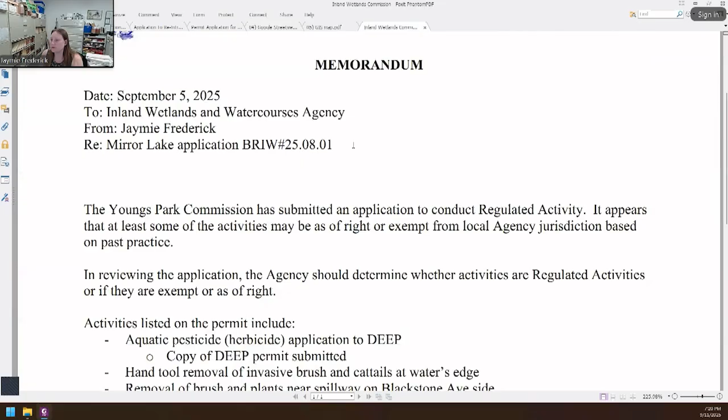This is Commissioner Bassermann. Jaymie, you mentioned that there was some uniqueness to this particular permit. Where does that raise your eyebrows in terms of its uniqueness? Yeah, so just for everyone's knowledge, this is a Google Street View image. It's kind of odd because it's not really from the street, but it's from June of this year. So I'm going to flip over to my memo where I kind of outlined the various activities. I think the aquatic pesticide application would be something omitted from the regulated activity the commission's reviewing based on past practice. I think the removal of invasive brush would be as of right based on past practice.

The management of cattails and removal of brush and plants near the spillway, I think, are activities the commission would probably want to keep within the purview of this permit, and perhaps move forward with reviewing those and issuing a permit for those activities if you felt it was appropriate to do so, and or requesting additional information to process that request. Because as we've established, the cattails are not invasive. I do know they can be considered aggressive, much like poison ivy, which is also native, and some other plants.

And then the removal of the brush and plants near the spillway, I think, is good from a maintenance standpoint. But given the fact that at this point it's kind of deferred maintenance, it would be consistent with the commission's past practice to take a permit and essentially have a final inspection to make sure that the work was within the scope of what was reviewed. This is Commissioner Bassermann, and as noted, if it was for the same reason that was mentioned, the spillway, the trimming of the trees would fall under that permit as well? I would agree.

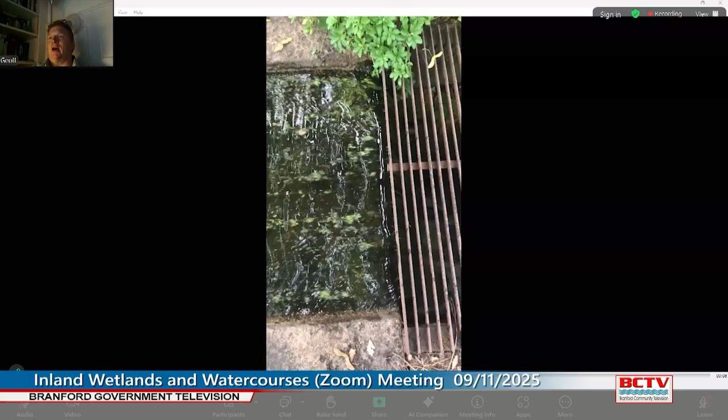I just emailed Jaymie a copy of a picture of the grating that currently exists over our spillway, which meets the DEP regulations. They have a whole set of regulations which makes all kinds of recommendations. The only thing that we might consider would be taking the grate and having it galvanized for longevity. But right now it's been there for 20 years, and I walk on it every once in a while, and it seems to be more than sufficient. Downstream, there is another pond, and he also has a grate over his culvert to keep snapping turtles from coming in and getting his ducks. And then downstream from there is a very shallow stream that goes directly to Long Island Sound, and these fish cannot live in salt water.

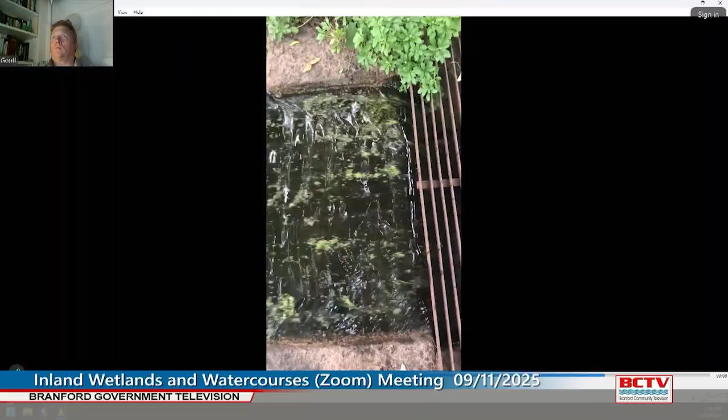This is Commissioner Bassermann. Do the carp have to be a certain size? They're triploid carp, and they come 8 to 12 inches, and they can grow to be up to 24 inches. And they're sterile, so they can't reproduce. Right. And the DEP recommendation was up to 36 based on the size of the pond. We were looking to do 15 to 20 as an introduction. Is the distance between the grate rails sufficient to keep the carp in the pond? Has that been determined? According to the DEP, it is. I did measure it at one time.

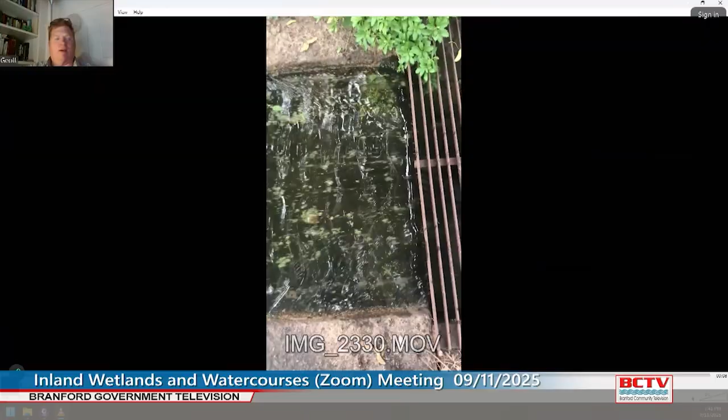This is Commissioner Bursky. Just a follow-up question. When you looked at the grates and measured them, there's no indication that the grates are loose in any way or would move? They're stable. It can be lifted up by 2 people. You can't see it all in the picture, but it's about 6 or 7 feet wide by 24 inches deep or more, maybe 36. That's a video. I have a photograph of it also. I understand that. That does technically answer my question. I'm trying to ensure that the grates are not so wobbly that if a fish grew to a size it could try to get under it or move the grate, but it doesn't sound like that's relevant. You're saying you need 2 people.

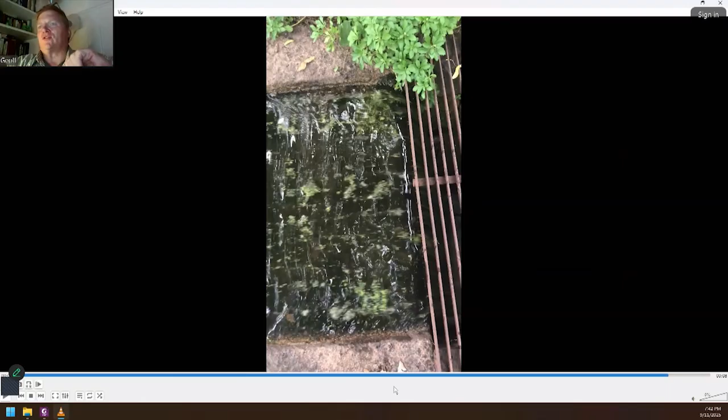Yeah. The grate is recessed. If you see it, it's actually at the bottom. You can see the spillway blocks are 24 inches wide or so, and that's shallow. That might get to 2 or 3 inches. And then at the bottom right, you'll see it's actually set into the stonework. So the stonework is set down 1.5 or 2 inches so that the grate rests on the stone, and then that continues to the back of the spillway. Okay. I appreciate that explanation. That helps. Thank you.

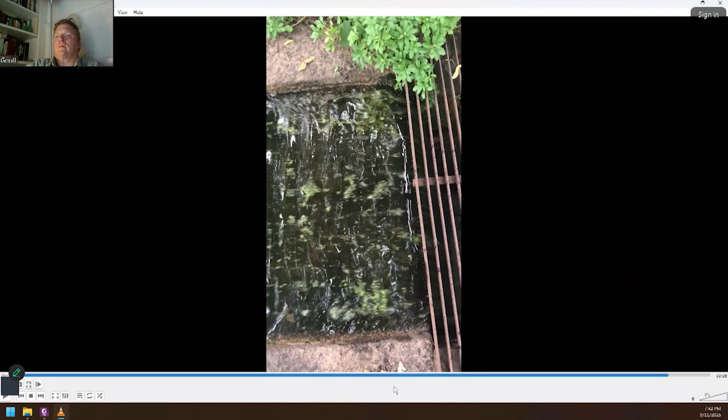Jaymie Frederick, the wetland agent. So this is also a pending application before the commission. If the commission determines that there's no jurisdiction, again, you'd make that determination. And then I would just suggest that since all the activities are outside of the commission's jurisdiction, I'd request the applicant withdraw the application since there's nothing to act on. And of course, if there needs to be a modification to that structure at any point, it might be a conversation at that time, beyond replacing the material of the grate, which I don't see having any significant impact.

This is Commissioner Bassermann. You indicated our jurisdiction essentially was associated with the grate. The grate looks like it's in decent shape, especially for how many years it's been in there. If it's not looking to be replaced, then we don't have to worry about the manner of installation and all that other kind of stuff. I think I'm okay with having the application withdrawn. Anybody feel differently?

No, this is Commissioner Bursky. I agree with you, Commissioner Bassermann. Do we have to take a vote on a withdrawal or no? No, I think there could be a general consensus here, and then I'll follow up with the applicant. Any commissioner feel differently? Sounds like we have general consensus, Jaymie.

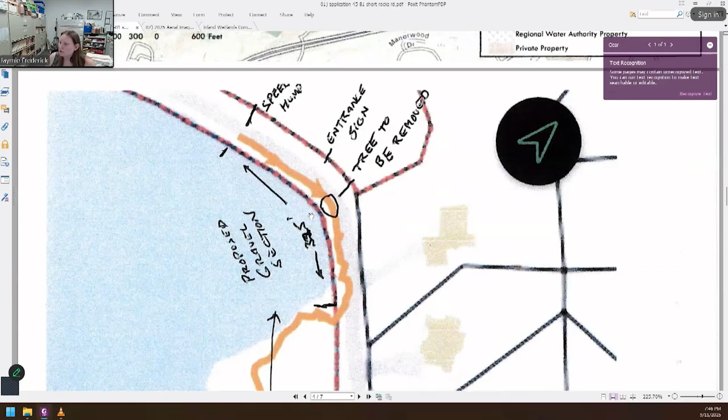Jaymie Frederick, the wetland agent. So this application is very similar to an application the commission had within the past year regarding a trail that kind of follows the roadway but provides an alternative pedestrian option, but on the other side of the pond. We do have the chairman from Parks and Open Space here to overview the application. And I'll just share an aerial image real quick to put it in perspective. Now I'm drawing a blank on the road. Short Rocks Road, coming in from the east side to Supply Ponds. The fish ladder access up to where the sign entering into the main portion of the park, I believe, is where they're looking to put the trail. So I will hand it over to Richard Shanahan to provide additional information.

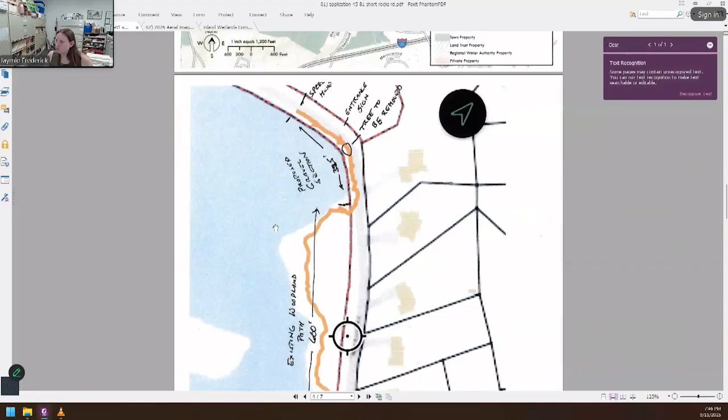Okay, if you could scroll up a little bit to get to that map. No, the other way. Sorry. Yeah, this is probably the most detailed I could provide. But as Jamie said, let me back up a little bit. There used to be a trail along this route years ago. I have no idea how long ago it was established. But over the years, with various storms and lack of use, it became pretty much all overgrown. We're trying to reclaim it. Parts are away from the road. From the parking area, it's like 65 feet. It's in the woods. There's a definite trail there. Then there's the other section about 600 feet long, and again, that's well away from the road.

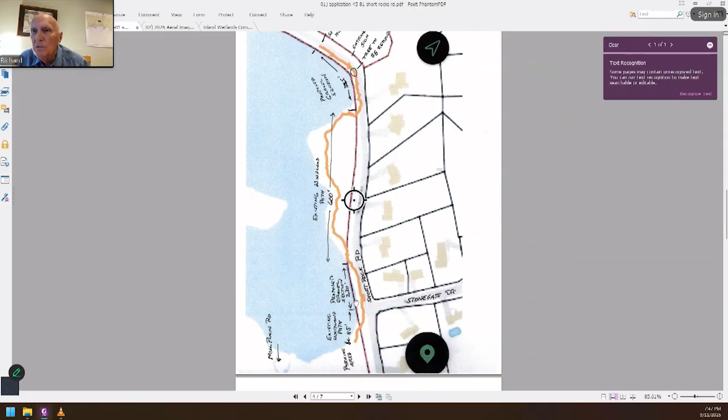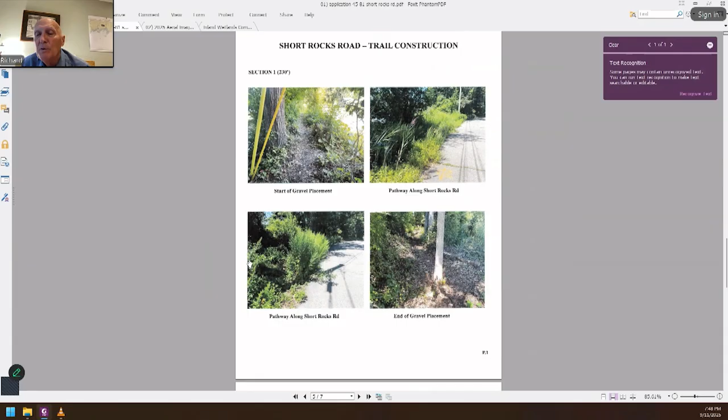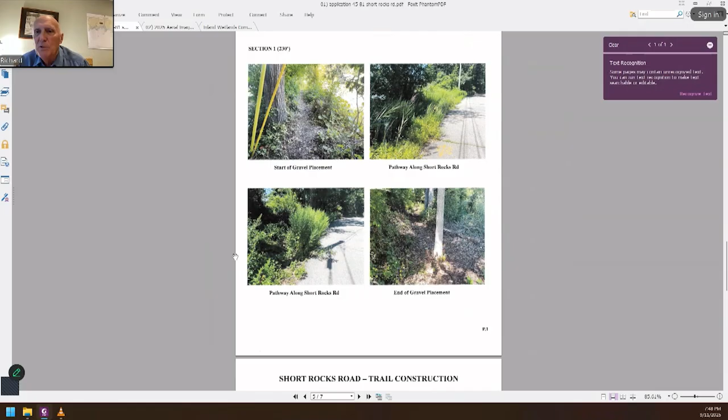The two sections that we're looking at: the first one is 230 feet. It's right along the road. Did the photographs come along with this, Jamie? Yeah. Okay, so in the first section here, the second and the third photographs just show you what it's like now. People are obviously forced to walk along the roadway. This section isn't too bad because it's fairly straight. But as people leave the supply ponds, they tend to pick up speed along here, and if you're walking with a dog, you truly are in the roadway. We're just trying to establish a trail basically adjacent to the road, and get rid of all those plants, most of which are invasives: mugwort, autumn olive, the usual culprits. We do want to put some gravel down to make it a definite trail, and just to get people off the road.

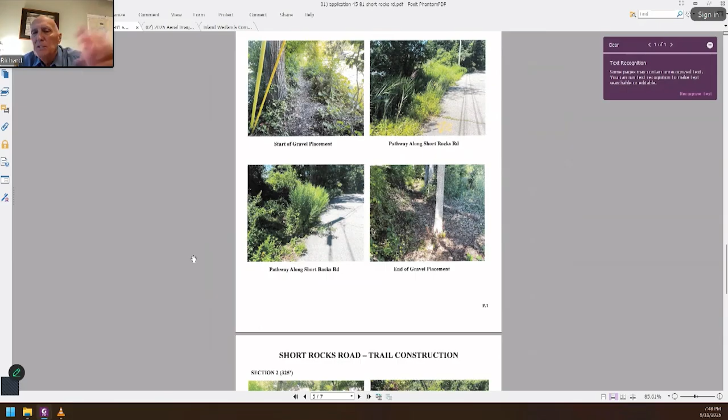So after this, it goes back into the woods. And then if you scroll down again, this is the second section. Where I said start of the gravel path, that's where it's going into the supply ponds. And again, the next three photos just show where it really is just trying to get people off the roadway.

The bottom two, you can really see where, because of the curve, it's a major sightline problem. And as people leave the supply ponds, the last speed hump, if you will, is just on the other side of that tree. So this is where people start to pick up speed.

Now, Jamie, where you had that hand, that is the tree that right now, out of this entire project, may be the more, I'm going to say difficult, but problematic. This is a half-dead tree. It's mostly covered with vines. At some point, it's going to die anyway and come down. But part of the project is to remove that tree.

This is Commissioner Bassermann, is that on the left or the right, Mr. Shanahan? I can't tell with the picture. That's on the pond side. On the far side? Okay. On the pond side, right. Oh, okay, pond side. Yeah, and it's fairly narrow there. So definitely the tree would have to come down if this goes through, because right now people are walking on the road and it is a blind spot.

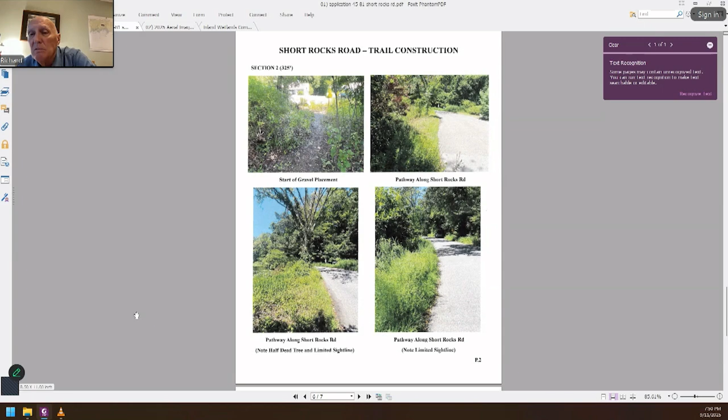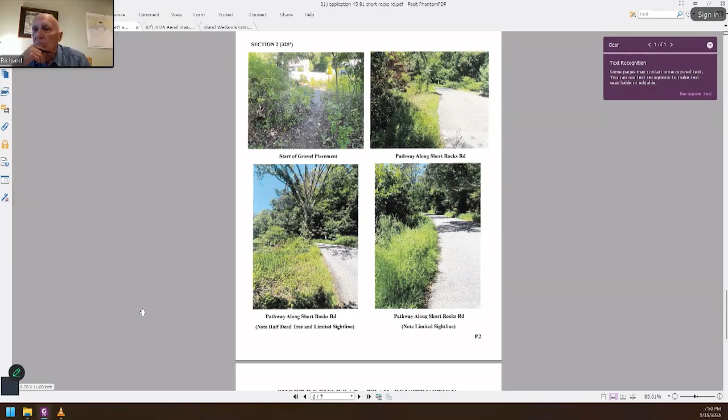And then the picture just to the right of that, where it's going into the supply ponds proper. Again, it's mostly weeds, just trying to get people off the roadway. And you can barely see, it's in the shadows, but that's the last speed hump. So the gravel path would go up to that speed hump. And then after that, people would be walking either on the side of the road or on the road.

Traffic, there's 3 speed humps fairly close together. So people really are slowing down here. Plus, it's more of a straightaway, and the sight line is really not an issue.

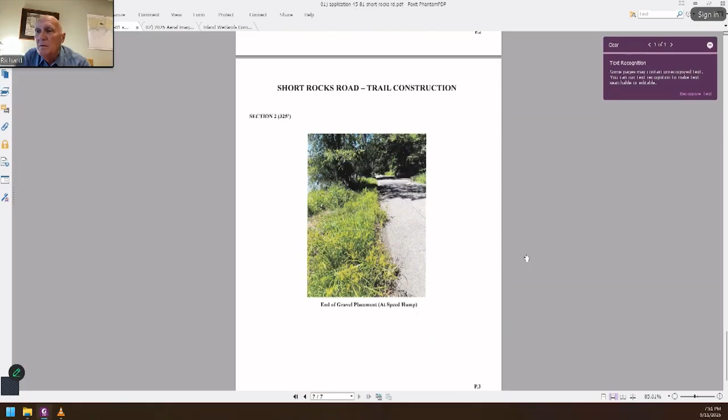This is Commissioner Bassermann, is the manner of removal anticipated? I'm sorry, the manner of removal of the plant material along the road? Well, basically, we're going to be putting down a gravel path, so Jim Boyd will be the contractor, and he'll be removing that and placing the gravel. Same type of gravel we have down by the Fishway, as well as on the trail along North Chestnut Street. The tree itself will be done by Wachowski and Son.

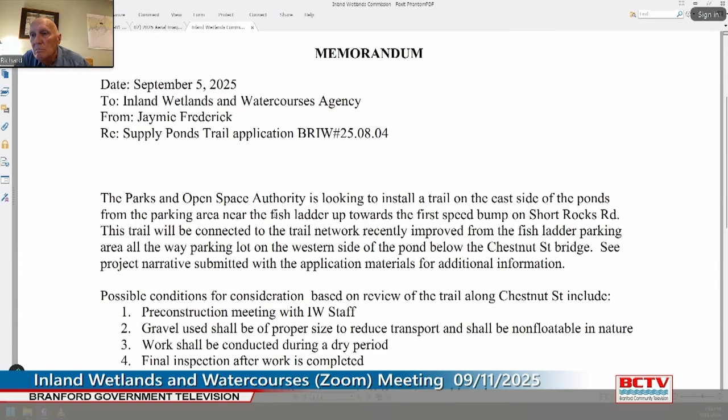This is Jamie. Commissioner Bursky. I'm sorry, Jamie. Go for it, Mursky. Thanks. I apologize if this is a silly question. Is this an extension of a previous application? Am I correct in thinking we approved an application of the same area or nearby? My memory might be off. I just wanted to make sure I have the facts correct, if you don't mind. No, that's a good question.

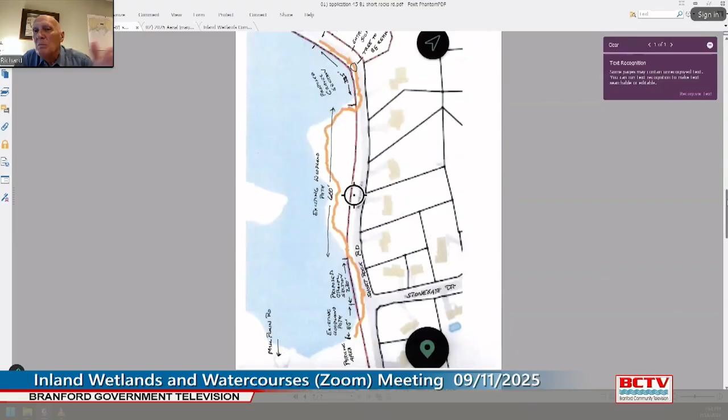Earlier this year we applied and were approved for a trail along North Chestnut Street on the opposite side of the pond. And that has been completed and is actually being fairly well utilized. But it's from where the hand is right now, from that parking area up to the next 2 parking areas up. It's to that point. So again, it just gets people off the road. There are no speed humps there, but this has actually worked out quite well.

Okay, this is Commissioner Bursky. I'm glad to hear that. So it's a different section, which is what I thought it was. I just wanted to clarify that I wasn't losing my mind. Same trail, same pond, just opposite side. Thank you.

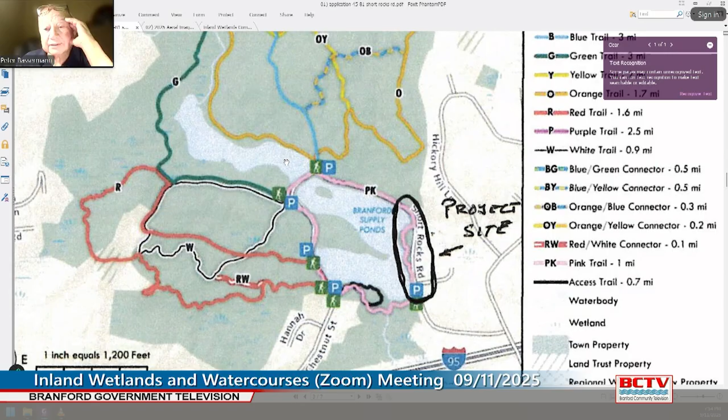Jaymie Frederick, the Wetland Agent. So I did prepare a memo for this application as well. And I essentially copied the conditions of approval from that last application, given that they are very similar in nature and just on opposite sides of the pond, if you will, for the commission's review and consideration. You want to post that, Jamie? Sure.

This is Commissioner Mirsky. Before you go over this, can I ask one question of you, Jamie? When you did a review of this application compared to the last one, recognizing there are two different sections and there seem to be some similarities, do you have any unusual concerns that would not be the standard similar issues we addressed with the previous application? Or is that not a fair question? That's a fair question. I don't have any unique concerns.

I did walk the proposed trail location with Richard Shanahan. So I'm familiar with where they're looking to put the trail, and I did review the tree they're looking to remove. We discussed whether it would make sense to try and plant another tree in the area. Looking around the area, though, the canopy is pretty well established, and there's not really another spot to put a tree that wouldn't become problematic. So I did not make that recommendation.

Essentially the possible conditions for consideration include a pre-construction meeting with IW staff that would extend to the contractor doing the site work, since I've already met with Richard Shanahan. Gravel used shall be of proper size to reduce transport and shall be non-floatable in nature. Work shall be conducted during a dry period, and a final inspection shall be completed after work is completed. And then, as is the case with all permits, the standard conditions and general provisions of all permits would apply.

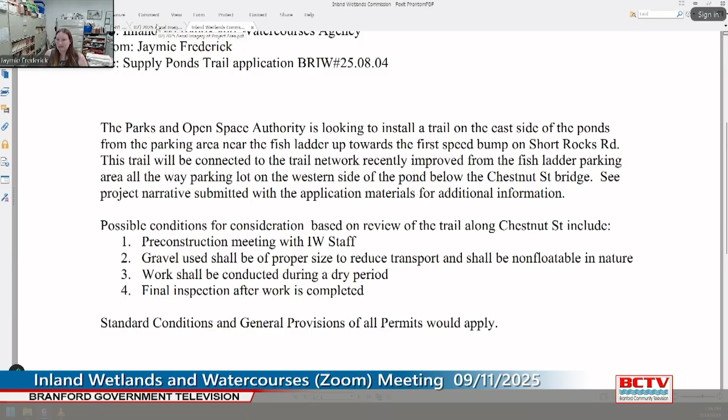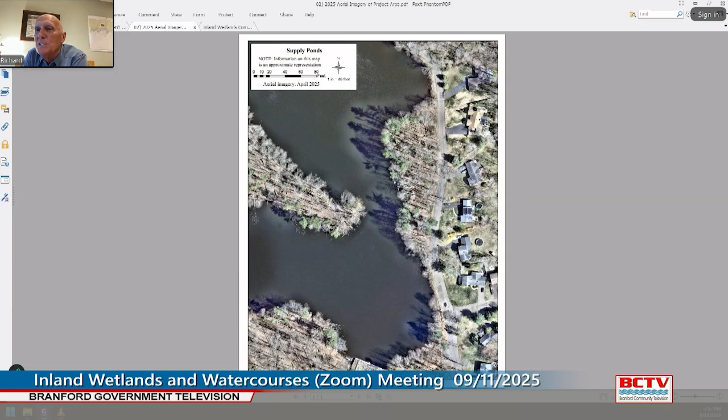Commissioner Bassermann: just a question, Jamie, the distance from the tree to the pond? It's like right there. So do we have any concern about how the tree would be removed? The distance there is very tight. I think we're only talking about 4 or maybe 5 feet total from the road to the pond, and the tree takes up about 2.5 feet of that. So the equipment to remove the tree would remain on the road? Correct.

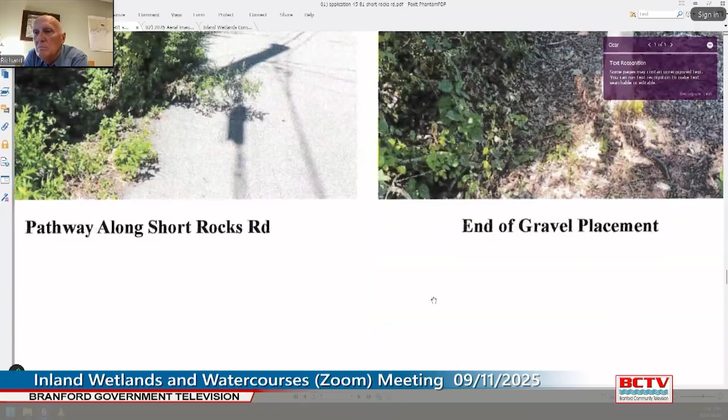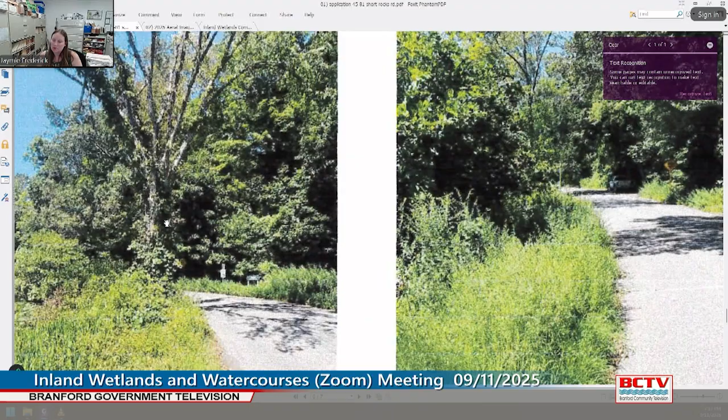Yeah, there should be no reason for them to go into the water or near the water. I think the bigger concern would be with the stump, getting it cut down flush enough to put the stone on top of it. But given that they are putting stone on top of it, it probably makes that process a little easier rather than trying to create a dirt path where that tree was. I did mention to Richard while we were out on the site, possibly using logs to help hold any stone in place where there is a slight slope going down towards the pond. I don't know if the commission feels that is condition worthy, but I figured I would mention it in case you want to add that as a condition.

For the most part, it's very gentle, but with dogs and kids and people using the trail. Commissioner Bassermann: yeah, I was more concerned about the removal activity as opposed to the post removal. I think the manner in which we're going to remove that, being so close to the pond... I think the proximity to the road kind of helps buffer that.

Yeah, I'm pretty sure they will have to close off the road, and they'll have a bucket truck and basically take it down limb by limb. I assume they'd also chip on site? I'm assuming so, yes, that's what they do when I've worked with them in the past. That's exactly what they do.

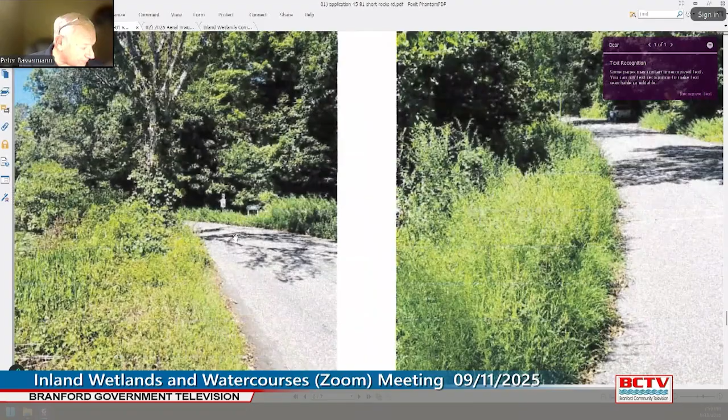Okay, I guess Jaymie, you want to put that quick memo up? Any commissioner want to add to the possible conditions for consideration that we're seeing on the screen for Chestnut Street?

Commissioner Bursky: I was just unclear about, I know Jaymie recommended the logs. It doesn't sound like it's absolutely necessary, but I'm just unclear if we as a commission feel it's necessary or not. I understand, Commissioner Bassermann, you weren't as concerned about it. I just wanted to clarify.

I don't recall off the top of my head. Jaymie Frederick, the Wetland agent: Richard Shanahan, did you put anything in the narrative regarding that? I did not. I mean, we could do so wherever it is deemed necessary. I think there may be one or two relatively small sections where that could be an issue. So if that wanted to be put into the conditions, I don't think that would be an issue, because I really don't think it would be that long of a distance.

Jaymie Frederick, the Wetland agent: I agree with that analysis. It was like 2 or 3 spots and it wasn't a long stretch.

Anybody want to take a crack at making a motion for BRIW 25.08.04? Commissioner Bursky: I'll make a motion and, like you, Commissioner, do the best I can.

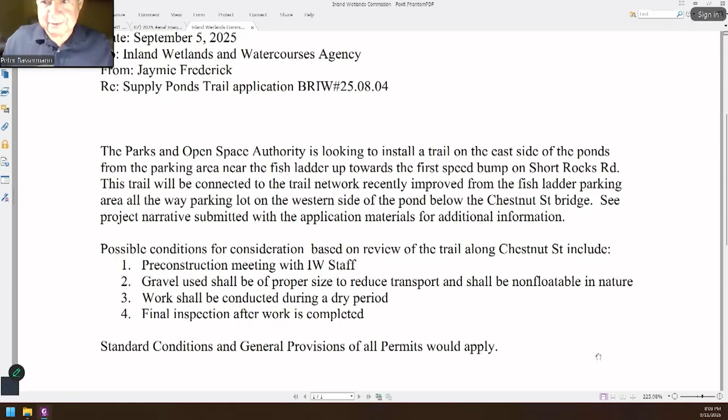Any further discussion on the motion? Commissioner Papantonis, aye. Commissioner Bursky, aye. Commissioner Sotomayor, aye. And Commissioner Bassermann, aye.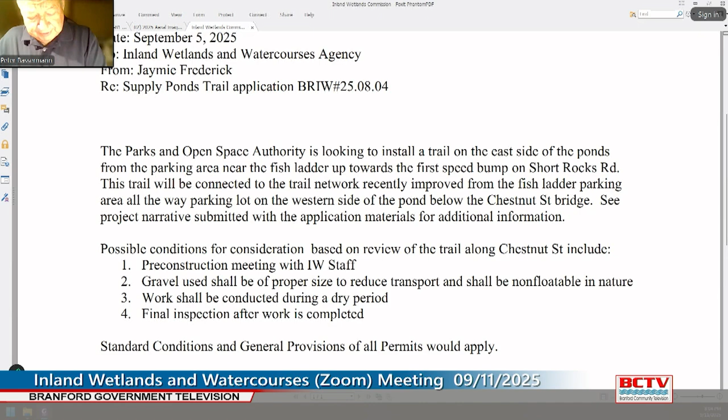Wetland application 250804, 39 Prospect Hill Road, residential addition and new septic.

Good evening, Jim Preddy, Criscuolo Engineering. Jaymie, do you want to do your thing first? If you want to jump in, I'm all down for a break. Okay.

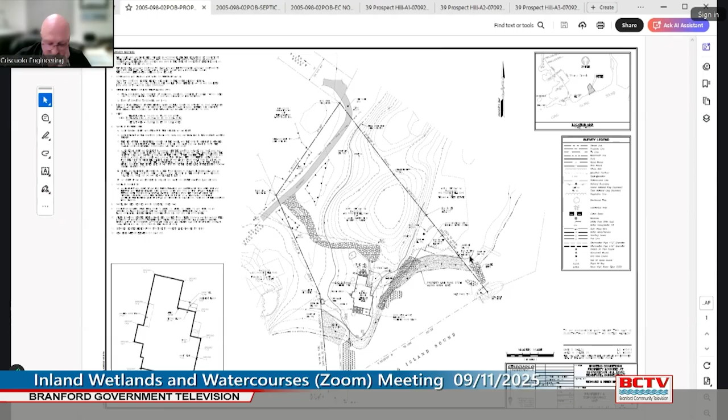This house was originally built in 1932. This property was approved by this commission, I think back in 2009, to split the lot and construct another house, but that was a previous owner and that approval has since lapsed. The existing gravel driveway comes up to the house from the road, and the existing septic system is over here on the edge of what's kind of a sand and stone beach area.

I guess back in the day they thought that was a good idea. There's a septic tank and a pump chamber and the force main over to this area. What we're proposing is the new owners, who bought the house a couple of years ago, would like to do an addition and a garage.

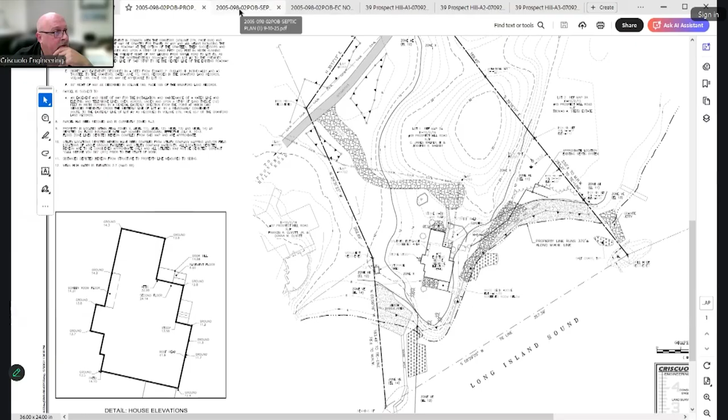This is the proposed plan that's been submitted, and now I'm going to zoom in so you can see. So again, this is the existing house. There's a small portion that'll be taken off, but this is an addition to the house. This is the garage, a detached garage -- I say detached only because that's how zoning looks at it -- but it is connected by a roof, so they'd have the ability to drive under here and come around, and the garage will have doors on both sides so they can drive in and out, or park under here and get in the house if it's raining without going in the garage.

So the driveway will be moved over to accommodate that. One of the other goals to doing that was providing this area for septic. This property is a lot of rock, shallow rock, and there's a large area here that's basically uphill of everything else.

So we have this area here that will provide a new, code-complying septic area. The old one will be abandoned, the old tank and pump chamber removed. We'll have a new gravity system, which, because they have city water, is a far better feature -- if they lose power, they don't lose the ability to flush toilets.

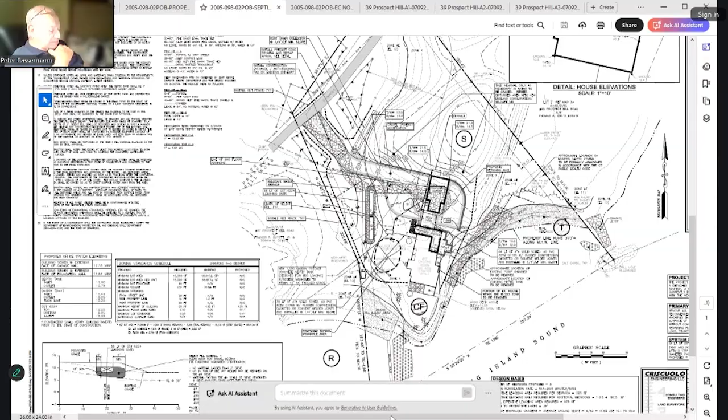Any concern, Jaymie, with the storage proposal here? Jaymie Frederick, the wetland agent.

I see the logic to disconnecting part of the roof and letting it surface flow over lawn area, and it does look like there's a decent amount of vegetation there. So I think perhaps reducing the amount of storage and denoting that area to remain in a natural state would strike a balance between stormwater management and maintaining a vegetated area. Also, those trees, I don't know what the balance is between what they'll process as far as the water budget versus the infiltrators, so I'd hate to take away a natural function to put in a structure.

Jim Preddy again, what we can do, because this area along the edge where the dry well is going is already lawn, we could actually put a second dry well, connect them, so we'll be somewhere in between the maximum storage and minimum storage. We won't need to clear those trees out to put that gallery in. Even better, I think that makes more sense.

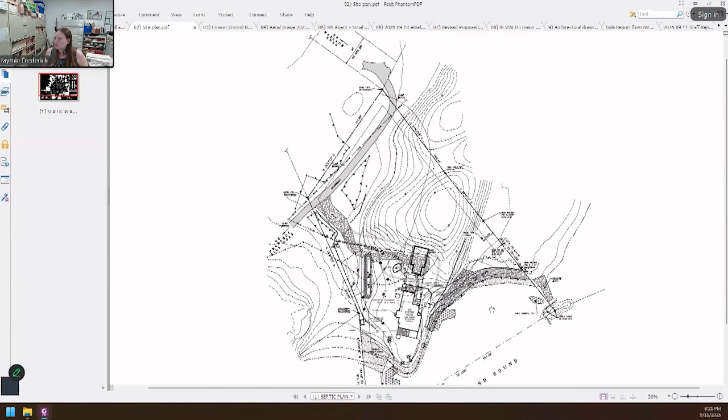Like I said, I think it's a little bit of a stretch, but I think that if you wanted to, it would be okay. So let me just kind of try and codify it. This is the old plan. This is the revised plan, which I did not note in my staff report, that it does in fact show an anti-tracking pad. So instead of having the infiltrators, we would be looking to install a second,

right, just to the left of that one. Just to the left of this one. So right along the driveway. Correct. And then if there's space, possibly provide some plantings between. Yeah, we can add some shrubs behind it. Yeah, and extend a little bit. We don't want to remove vegetation, but put in vegetation. Correct. Okay, so

Remove infiltrators, add a second gallery. No, a second dry well. Sorry, dry well. Yep. Remove and then add. And then add plantings between stormwater management and existing vegetation, to be approved by duly authorized agent.

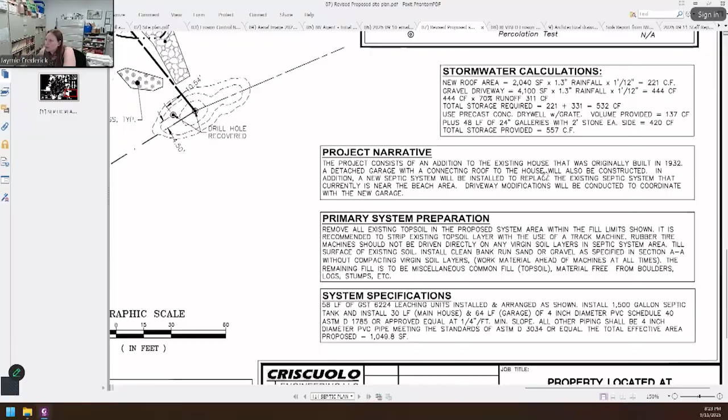So that would be an additional condition for consideration that I do not currently have in the staff report. All the other conditions. But I think that, you know, you've got the details. We've got the breakup of the stormwater over here. So it's pretty set what it is we're looking for. So I think that would be okay.

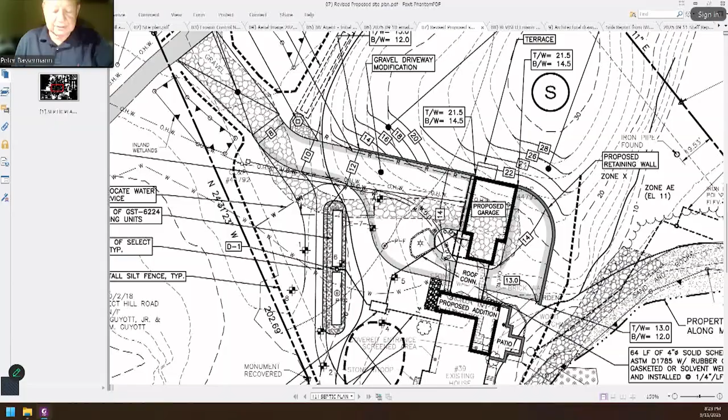So Commissioner Bassermann, do you have a screenshot that captures what you just articulated? I have shorthand notes that I just scribbled. Hopefully Katie was typing. Not typing, but writing. So I got it. Okay, good. Okay.

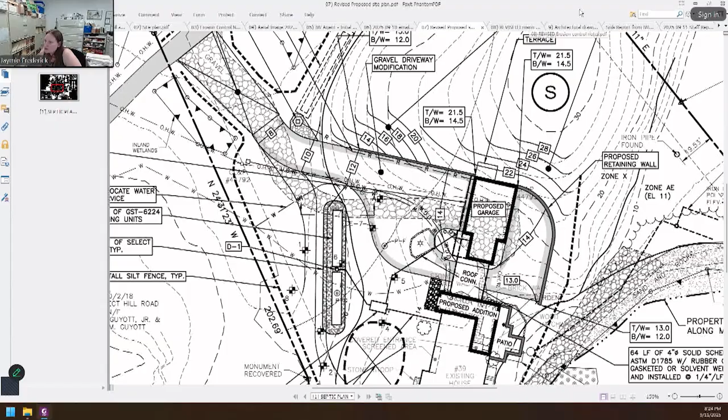I did prepare a staff report for this. I didn't prepare it until today because we got revised plans yesterday and I realized it didn't end up in the Dropbox, but I did send it to the applicant this afternoon. So if we want to quickly run through this. Perfect. Yep. It references the report from 2009 that Mr. Purdy already went over. Adjacent municipality and RDA notices were not applicable. We already went over the subdivision history. There's silt fence proposed for sediment and erosion controls. There is an anti-tracking pad proposed, so disregard that sentence.

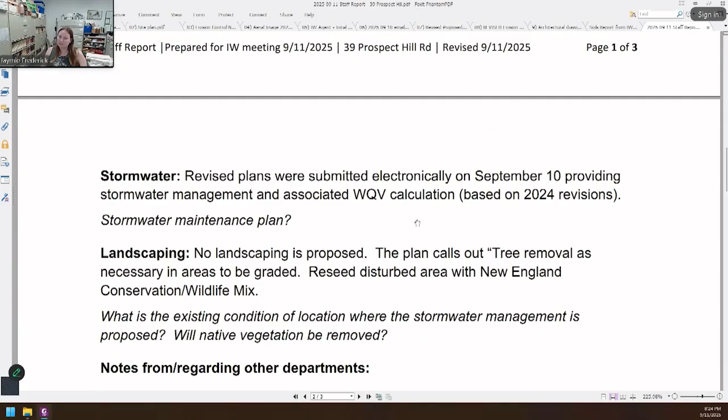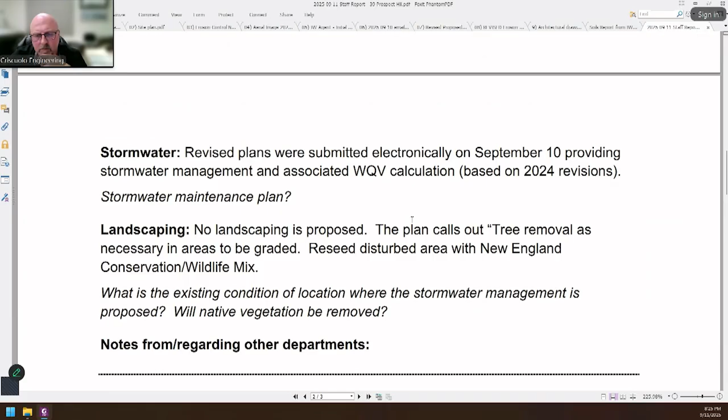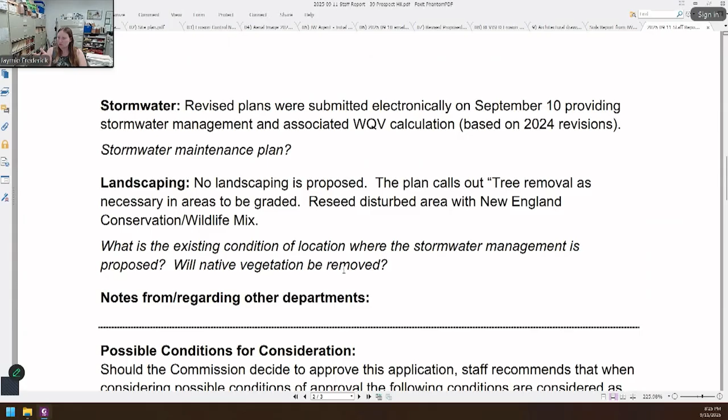Revised plans were submitted. Was there stormwater maintenance information included in the application materials that I missed? No, I need to add the note about cleaning out the dry well. Okay, so maintenance for dry well, which would be only once or twice a year, really, another possible condition of approval. Landscaping, no landscaping is proposed. We talked about adding landscaping just now to the area between the dry wells and the existing vegetated areas. And we already went over the conservation wildlife mix and the stormwater management concern relative to existing vegetation.

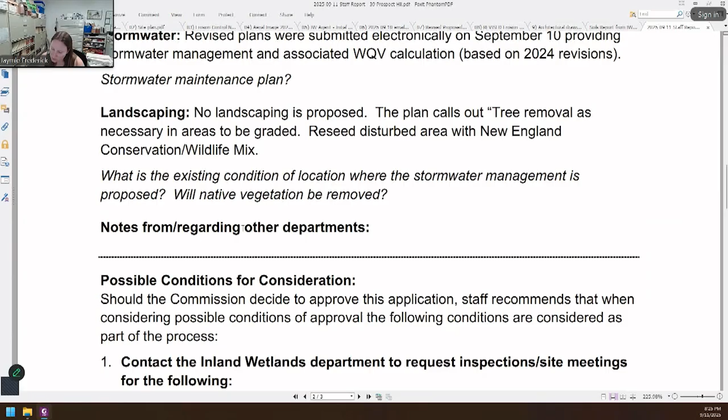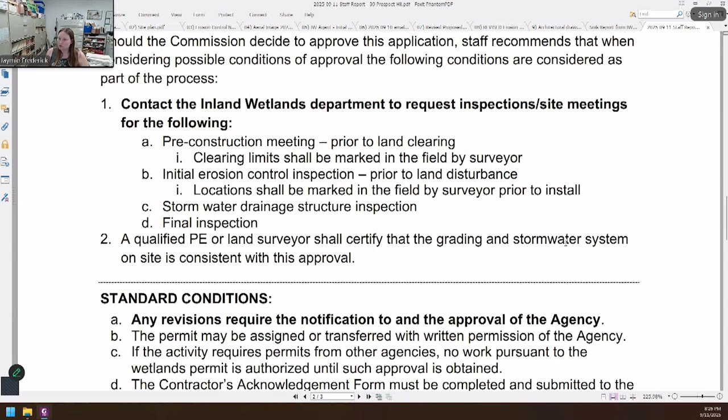So in addition to maintenance for the dry well and a revised plan showing the 2 dry wells, removal of the infiltrators and planting plan, other possible conditions for consideration would include pre-construction meeting, initial erosion control inspection, stormwater drainage structure inspection, final inspection, and certification from a qualified PE or land surveyor that the grading and stormwater on site is consistent with approval. And the standard conditions and general provisions.

Well, I guess we do not have a document capturing the 3 additional conditions, correct? Other than Katie's written note that only she has. If you want, I can try and quickly type something up that we can use as an amendment. Or are we better off taking the 2 weeks, preparing the staff report with all of the necessary words in the possible conditions and deal with it in 2 weeks? Is that a little easier for staff?

I think at that point we might even have a revised plan. Yeah, that's fine. I don't think it affects, because we're not scheduled to be on the 18th for zoning. Oh, okay. So we'll look for that revised plan, and then rather than having it be for review by the agent, hopefully we can get it all wrapped up and moving forward at the September 25th meeting. Commissioner Bassermann, I think that's acceptable, Mr. Purdy? Yes. Great. Okay. Thank you for that. No problem.

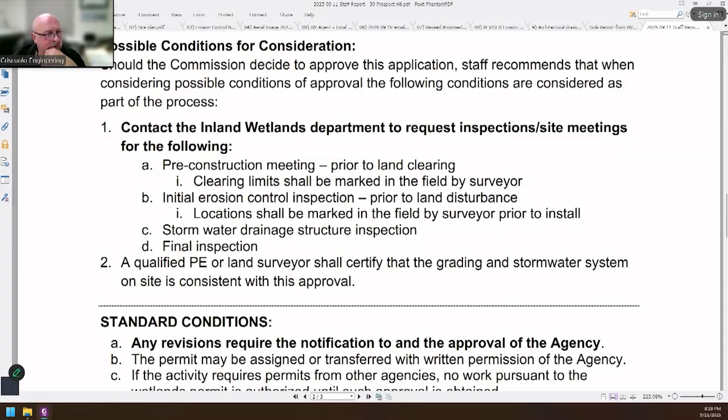Okay. Enforcement, cease and correct 250901, 15 Pinewood Road, clearing and encroachment into the wetland area. There's a new one. Okay. Jamie? Jaymie Frederick, the wetland agent. So we were notified that there was some work going on at the site. Katie reached out and started correspondence, met with the property owners on site, told them next steps is to start off with getting a wetland delineation. Wetland delineation was completed. They toed in the silt fence that was placed on site so that it would function properly. I went out to check the silt fence and saw that some of the silt fence was within the wetland area.

Luckily, parts of the area within the silt fence were undisturbed, so not really impacted. There was a small area that was impacted, so I've advised that they get a planting plan from the wetland scientist that did the delineation to address the impacted wetland area, and perhaps provide a bit of a buffer between what would be maintained as lawn versus the wetland area, and submit an application for any site plan changes, lawn

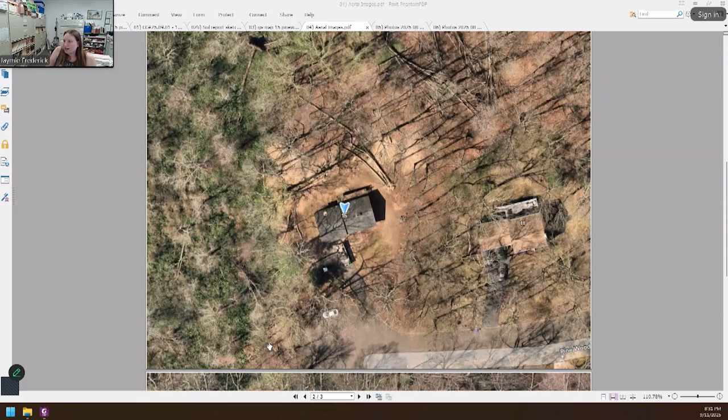So you can see that there has been some activity on site, but you can also see from the previous aerial, it's kind of hard to see, that some of those trees were down. And then this is just a GIS map to give a little bit more context. The railroad tracks, Birch Road, Meadowwood, Pinewood, subject site. And this is kind of a large wetland complex that runs north-south at the end of the cul-de-sac. So we have received the wetland report. The wetland flags were out when I went out.

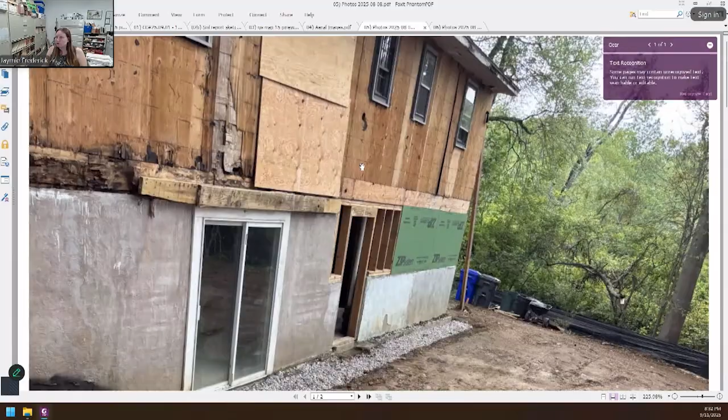And I am going to show you photos. I think these are from when Katie went out to the site initially. So you can see that there was some grading. I don't think there were significant grade changes. I think it was mostly smoothing things out. There was a deck previously that they're looking to, I believe, reinstall and put a patio and small retaining wall, and also establish a parking spot on the side of the house. You can see the silt fence. It mostly follows where the wetland limits are.

And then this is looking north away from the house. And then these are photos from when I went out to the site. So the pink flags are the wetland flags. The silt fence, like I said, mostly follows where the wetland flags were. There's just a small area that was impacted by some of the activities. Again, wetland flag, silt fence, wetland flag. And then here we're starting to get into the area where the silt fence kind of crosses with the wetlands. You can see a silt flag up here. Wetland flag.

So it's not a huge amount of disturbance. It looks like this area was not regraded. There are some wood chips from the tree removal, but they should decompose. But I think that it's worthy of having the soil scientist assess a planting plan to help make sure this area restabilizes as is appropriate for a wetland area. And I took some pictures, this one's of the wetland area, just to show that the main wetland area on the other side of the silt fence remains mostly undisturbed. I think this is remnant of some of the trash and debris that they were removing from the site. So I think the commission gets the idea.

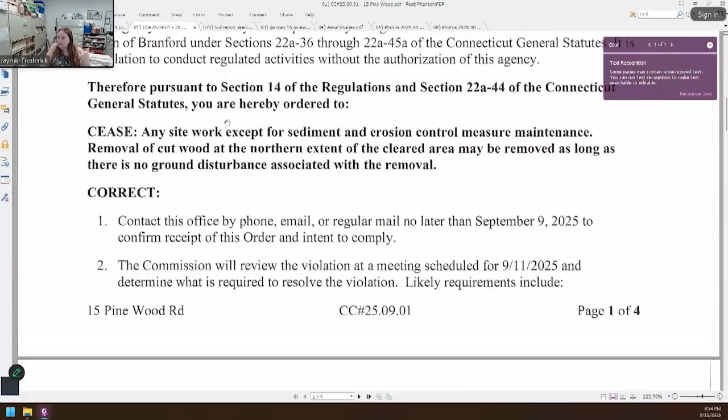Unless you have any questions for me, I guess I'll quickly run through the cease and correct. So basically, they've stopped work. I told them that they could remove the cut up sections of the tree that were at the northern extent of the cleared area. They have been in communication with us in regards to getting an application ready. And so tonight we're reviewing the activity, and the action points are that an application needs to be submitted and a restoration plan will likely be required for the impacted wetland area.

So unless the commission has any questions for me, I guess I would at this point hand it over to the property owner to present anything additional, or ask any questions that you have.

I guess if the commission doesn't have any questions, I'll just introduce myself. I'm Georgia Lundberg, and this is my partner, Alex Manzi. We're both Branford residents, and we bought this property at auction in the springtime, and we began preparing the lot for necessary improvements and trash removal back in April.

So our intention was, and it continues to be, as we told Jaymie and Katie, simply restoring damage done to the property after years of neglect. So not changing any of the water flow, soil erosion, or other wildlife that lives in the land. So it's our belief that besides removal of trees and trash, the lot looks very similar to when we began prep. Photos taken before and after kind of reference our clearing of the plot, though the only act that I believe affected the topography of the land and our encroachment would be caused by heavy rainfall and other natural erosion like tree fall.

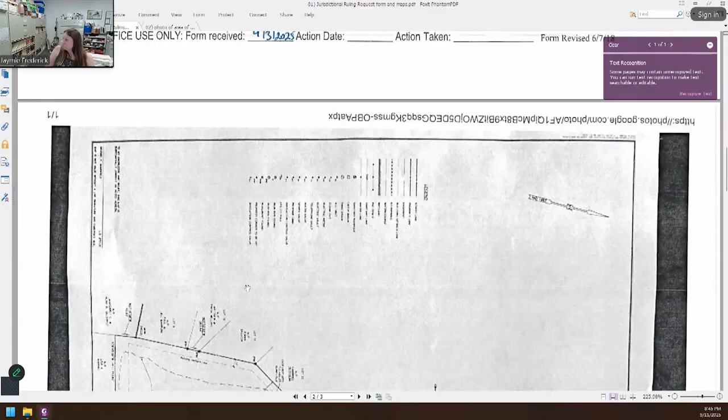A little brief summary was provided. They're not planning to use any chemicals. They're planning to routinely cut it and dispose of the material at the transfer station. I don't have anything else to add unless commissioners have questions, but I'll hand it over to Mr. McKay if he wants to add anything, clarify anything, introduce himself.

Hi there. Can you hear me okay? Yes. Oh, great. I am relatively new to Branford. I moved to Branford 2 years ago after retiring 5 years ago in 2020. My wife and I moved here to be closer to family. We purchased a home on Louisa Court. The area of phragmites is pretty much very close to our back yard, so I get to look at this all the time.

Shortly after moving to Branford, I joined the Branford Land Trust maintenance crew. We maintain the trails. We have about 30 miles of trails in the town. And I have been working on the maintenance crew for the past 2 years with them. Last year, I just completed a course at UConn for a Master Woodland Manager designation, along with 3 other members of the maintenance crew.

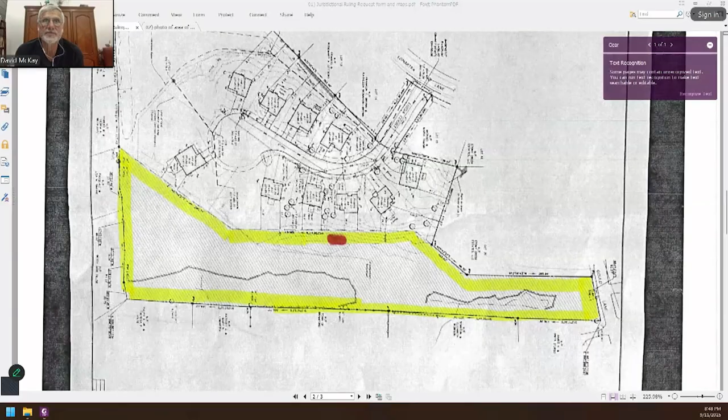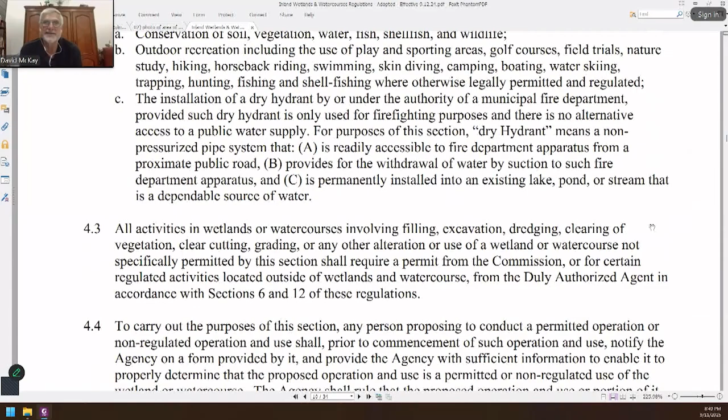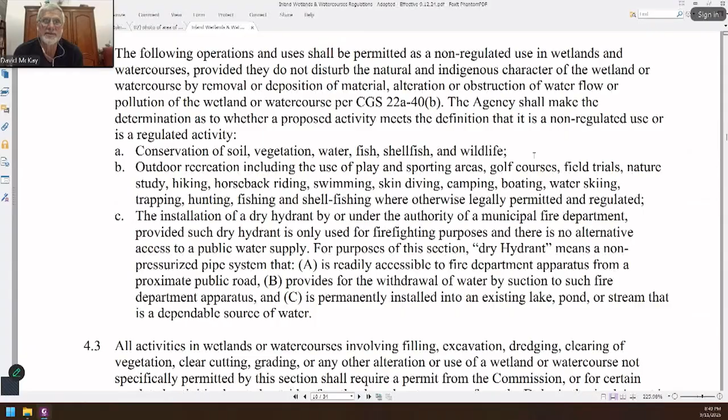Thank you. Thank God you're retired. Pardon me? Thank God you're retired. Thank God I'm retired. Yes. Well, I love being outside. I love going on the trails. I did 2 jobs today for the land trust, so I keep myself busy. Yeah.

And this is non-permit required, right, Jaymie? What we're looking at? You're muted, Jaymie. Sorry, thank you. Jaymie Frederick, the Wetland Agent. So this is a jurisdictional ruling request in relation to 4.2A, conservation of soil, vegetation, water, fish, shellfish, and wildlife. Generally speaking, management of invasives where there's no ground disturbance or alteration to that area other than the removal of the invasives has been considered as of right by the commission. So I do think it would be appropriate to grant the request.

I think we've seen this before, and I think it's been as of right previously. I see no reason to differ from precedent here. Pretty straightforward. Does this require a vote, Jaymie? I think a motion would be appropriate. All right, I'll make a motion that jurisdictional ruling 250901, Louisa Court, the removal of Phragmites, be as of right in accordance with 4.2 of the Town of Branford regulations for inland wetlands and watercourses. And it's expected that this would be an activity that would take 3 to 5 years for the removal of the invasives.

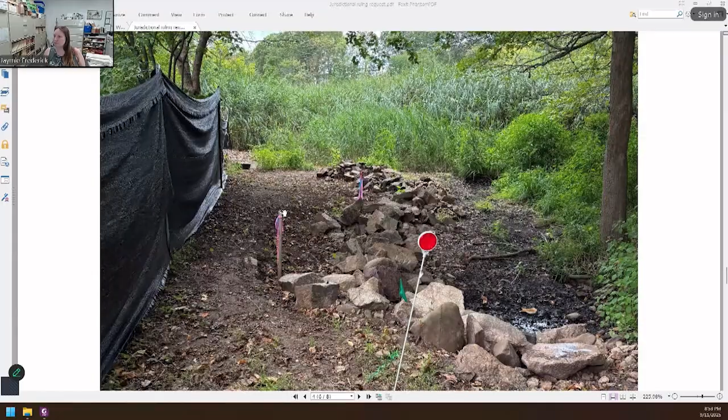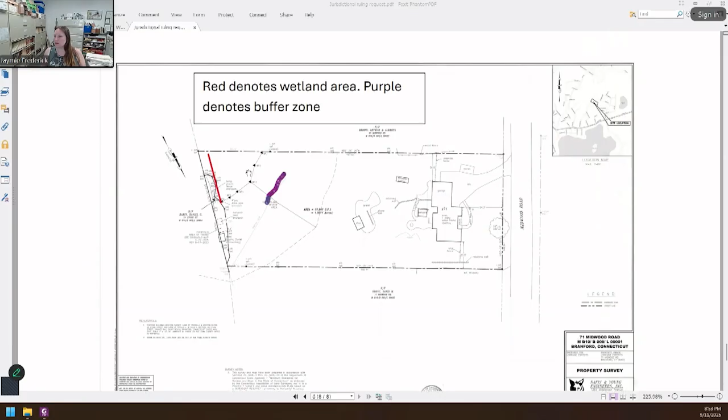in the area. I will screen share the request. More specifically, I will jump down to some of the pictures and maps. This is, I think, a general reference picture and area where the knotweed was removed, looking in both directions. And then a map showing on site the wetland area and the area, I believe, where the wood chips are being proposed. I'll let the requestee clarify in regards to the red and the purple, and the full extent of the areas that she's looking to put the wood chips.

She initially submitted a sign-off request. As there's activity in the wetland, I cannot review this administratively. It has to go before the commission. So, without rambling any longer, I will hand it over to Esposito to clarify and fill in with whatever information she thinks would be helpful for the commission. Great. Okay, thank you. So Lorraine Esposito.

This is just the area that I removed the knotweed in, and I just took the knotweed out, but it was so thick that by taking it out, the ground is bare, and it is subject to runoff from adjacent properties, and I don't want to see it wash away, and it will help to control the regrowth a little bit. It just so happened that I have a large tree in my front yard that will be taken down by Eversource, and they're going to grind up all those wood chips. And I thought it was a perfect fit to put those wood chips in that area and stabilize the soil temporarily while I work on the replanting plan that we talked about in the last meeting.

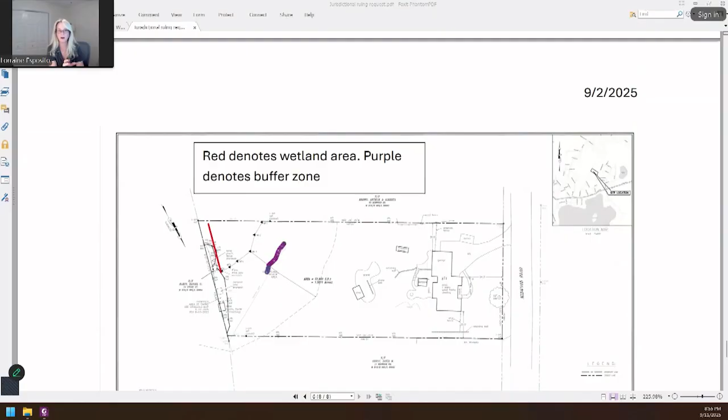Well, one other thing is the map that she showed. The red line denotes the area - it's kind of the wetland area that the removal left bare. The purple line relates to that first image that was shown, which looked like a general image - up past that big boulder next to the tree and the cliff. That area also doesn't have a lot of vegetation, and water runoff coming down from those cliffs tends to erode the soil.

I do put wood chips in the path and trail that's there, but I had not expanded that to the bare spots next to the cliff, and I would like to do that. That's not in wetlands - that's the buffer zone. So that would be the purple area right there. Looks like it's 30 to 40 feet away from the wetland.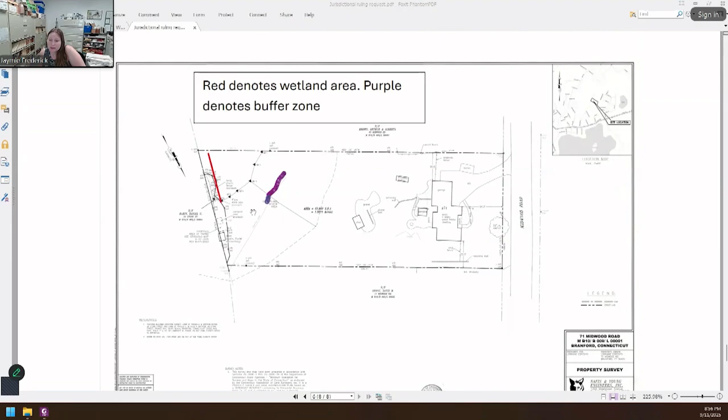This is Commissioner Bassermann. Jaymie, have you been on site? I have not been on site recently. I don't have concerns - I see the intent behind wanting to place the wood chips. I don't think that the wood chips in this location, at the base of the bedrock or the ledge, will have an impact on the wetland.

My only hesitancy in this location would be floatability. Does this area flood often? It doesn't flood, but when it rains - relative to the picture, the red little snow stick - in the area that would be off out of the picture toward us looking at it, upland, where my dog is.

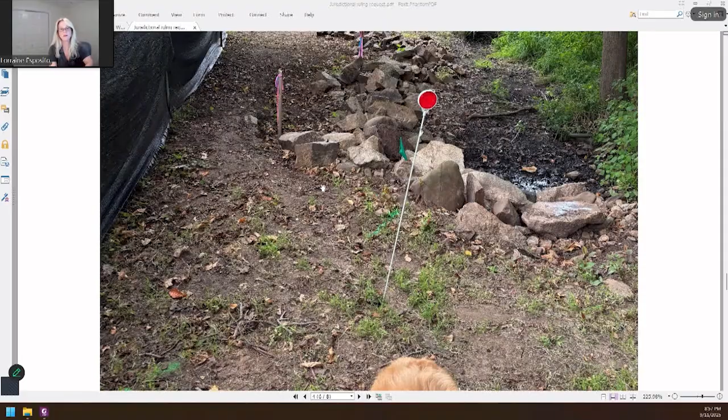Coming down that path, which is not in the wetlands - that's not wetland. The water does rush through there in a heavy rain. You can see the trough. So it would be great to have sediment control, erosion control, so the water doesn't keep going. And if you see to the left of the stick, there's a deep gully there - it would be nice to just stabilize that so it doesn't pond.

And you can see in the ditch there's an awful lot that has already gone in there. So it would be good to just sort of stabilize everything, and those rocks that are there would prevent the wood chips from finding their way into the gully. It isn't absolutely necessary - it's just, I thought, perfect timing because I'll have a lot of wood chips.

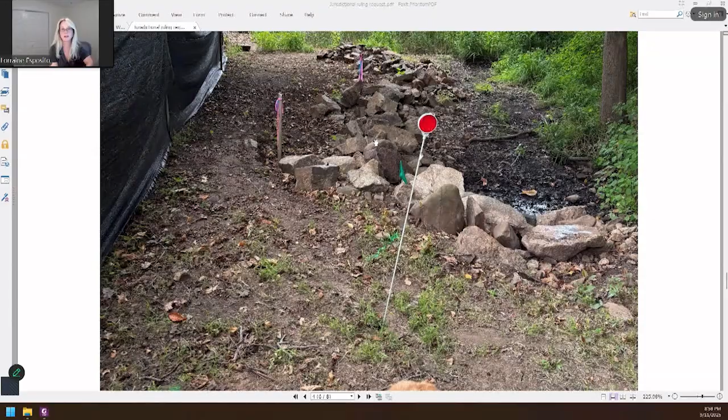Jaymie Frederick, the wetland agent: so my feedback for the commission to consider is, the area does look bare. It does look like it would benefit from having some sort of ground stabilization. Like I mentioned, I do have a little bit of concern about floatability, but it looks like this might be the area of higher concern relative to over here, based on review of the images and the information just provided by the property owner.

Commissioner Bassermann: Jaymie, would the installation of some ground cover with the wood chips help with some of the concern about movability? I think the property owner is looking to consider a planting plan in the future. So my two thoughts are: one, depth of the wood chips, making sure it's not too thick that it hinders future ability to plant, and two, again, that floatability, which I don't think is necessarily a reason not to do it, but should be considered and monitored.

And maybe some staked hay bales are installed in locations where migration of wood chips could occur, just to make sure the wood chips don't end up in the wetland and primary water channel. So I have one other comment: the actual wetlands are on the inside of the stakes, so they are rocks in versus rocks to the fence. So a big portion of this is not technically wetland, but it does become wetland.

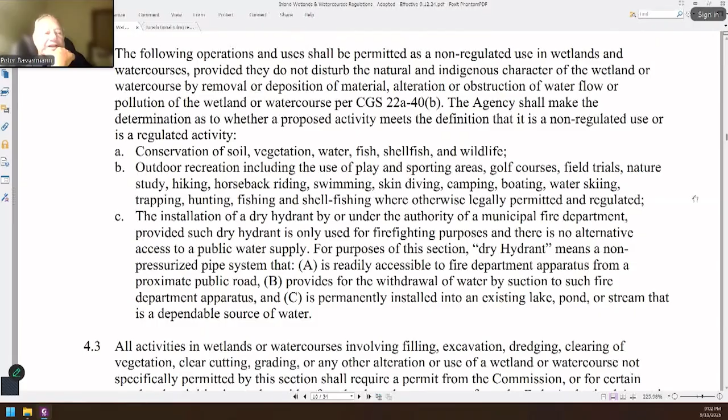Is conservation a defined term? No, I don't believe so, not in our regulations. I mean, of course it is, just not defined in our regulation. Let's double check though. We've got it here. No.

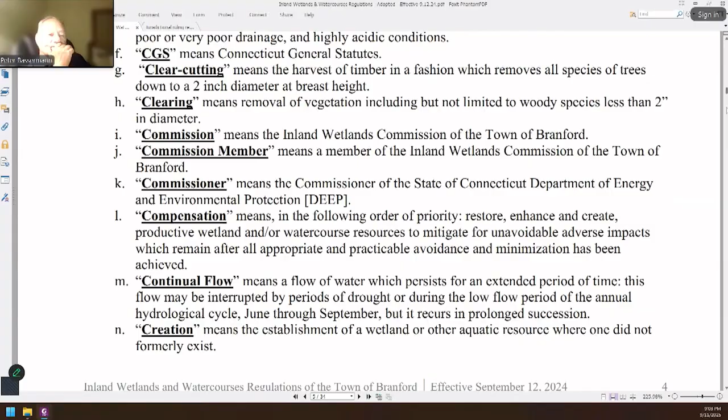My only concern would be making sure it doesn't become filling. I'm not concerned about placement of natural wood chips per se in this location, as long as the commission agrees, in a 2 to 4 inch layer, which I think will decompose and perhaps provide benefits to future planting of the area. My only concern is any migration into the watercourse portion of the wetland complex, making sure it doesn't hinder flows or fill other parts of the wetland unintentionally, which I think is easy to avoid.

I would just want the property owner to be aware and considering that. Looks like the property owner has a comment. Sorry, thank god for cameras. It's Lorraine Esposito. If I should make it less than 2, I will. Tell me how thick you'd be comfortable with and I'll put less. I just put 2 to 4 because that's what the literature recommended, but I'll adjust.

Yeah, but you don't know the size of the chip at this point either. That's a very good point, you're absolutely right, I don't know. I'm okay with 2 to 4. I think the economics are going to be what they are. Hopefully you got more chips than you know what to do with. Oh my god.

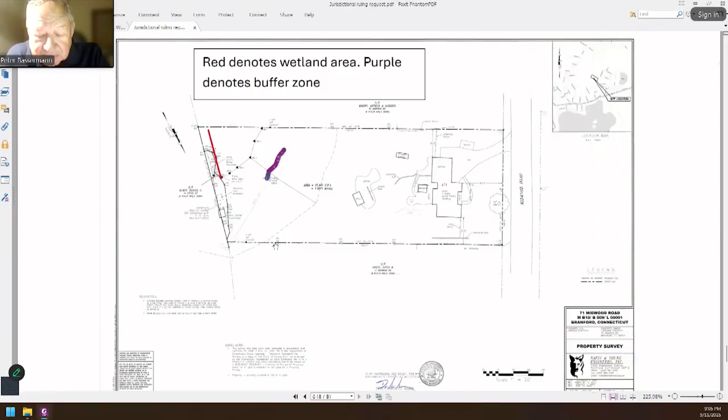Is there somebody who wants to make a motion for jurisdictional ruling on 250902? I'll make a motion for 250902, 71 Midwood, the application placement of wood chips in an area which is going to be applied as a result of the removal of invasive species in the area denoted. Oh, there is no, how do I denote this screenshot, Jamie? Page 8 of the request, to mitigate stormwater. Yeah, that's the end.

Is there a second? Commissioner Papantonis, second. Any further discussion? All right, we'll take a vote. Oh, this is an as of right, I don't think I put that in the motion. This is an as of right for 250902. Commissioner Papantonis? Friendly amendment. Yes, still second. Okay, Commissioner Sotomayor? Aye. Commissioner Mirsky? Aye.

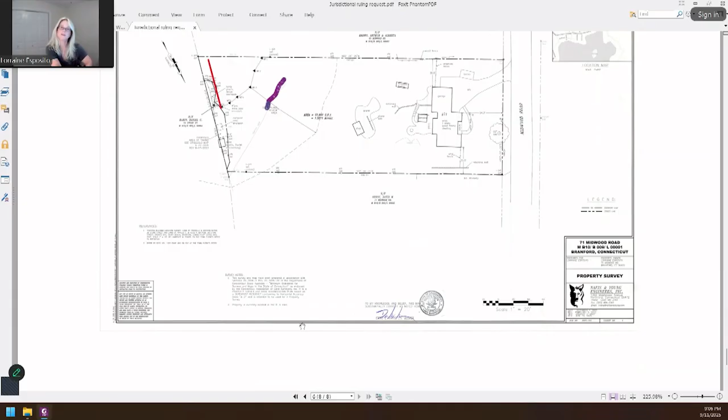By the way, when is that tree coming down, do you know? This is Lorraine Esposito. I've got Lucas Tree coming within the next week or two, that's the best I got. Gotcha, do you want me to update you when that happens? You're right, I was going to say, perhaps you're looking for some wood chips.

Not so much. Okay, darn it. Thank you very much. You got it. Nothing on 7. Number 8, other business.

Application for review and approval per regulation 7.1. Paper applications forming the regulated activity. This whole area is yours to talk about, Jamie. Yes, how lucky. Jaymie Frederick, Wetland Agent.

As we discussed at the last meeting, we as a town are looking to implement online permitting software. As part of that, we've been entering all of the permits into the permitting software. There are minor tweaks to make it fit the system, but also perhaps to look at where we might be able to slightly improve things.

I presented everything last time, and I said I would send everything out so people could look at it, and hopefully we'd be able to truncate the conversation to questions, comments, concerns. I want to point out that per section 7.1 of the regulations, it states any new application forms or modifications to existing application forms will be voted upon by the agency for adoption.

I know we only have 4 commissioners present, but if everyone's comfortable we can go forward as a quorum. I haven't received any comments or questions from commissioners, so I'm assuming it was pretty straightforward, especially since the bulk of it is just copying our applications into the system. I did today update the Dropbox to include the existing application forms because I realized I had omitted that previously.

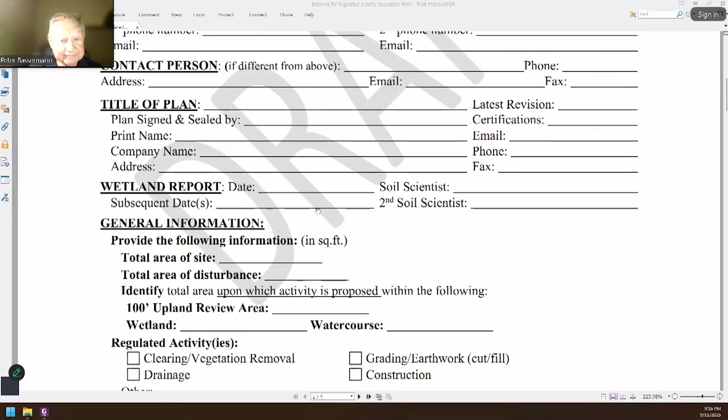Jaymie Frederick, Inland Wetland Agent. Does that include updating the paper application to make reference to the online application options and also updating the check boxes regarding regulated activities to eliminate confusion as discussed at the previous meeting? I didn't say that, but I'll take that as a friendly amendment. Friendly amendment accepted. Any other comments from the commission?

Commissioner Papantonis. Commissioner Papantonis, aye. Commissioner Sotomayor. Commissioner Sotomayor, aye. Commissioner Mirsky. Commissioner Mirsky, aye. Commissioner Bassermann, aye.

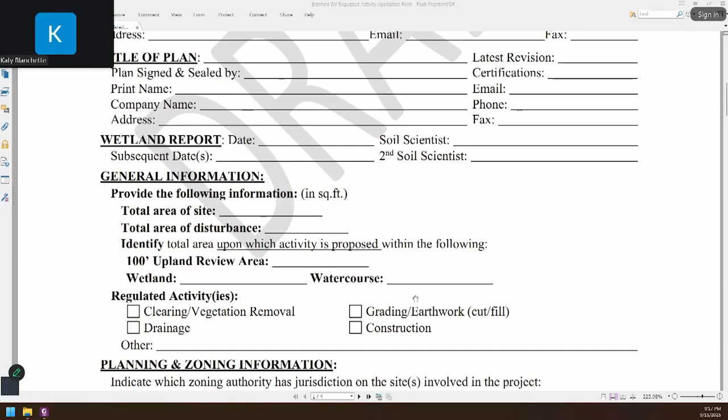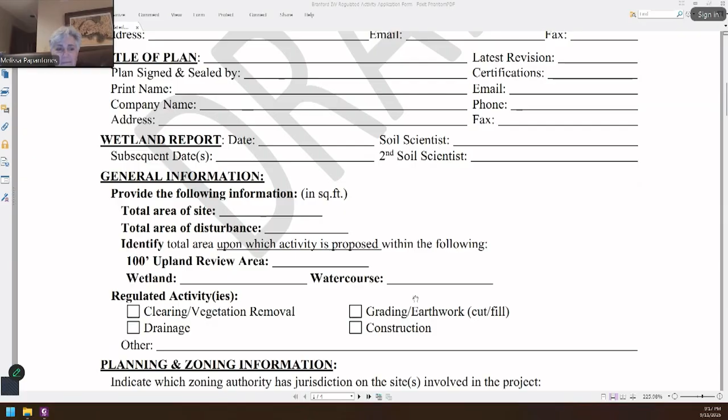Okay. Inland Wetland Associate Katy Blanchette, who seconded that? I didn't hear who the second was. I'm not sure there was one, now that you raised that question, Katie. Thank you. That's okay. This is Commissioner Papantonis. I'll second. Look at that. You're on a roll tonight. Thank you, Katie. Thank you, Commissioner Papantonis.

All right, Inland Wetland 24-1001, Island View Village drainage repair. This is a request for the release of the bonds, sediment and erosion controls, associated with the drainage repair. Jamie, this is something that's been completed and they're looking to release the bond? Correct. Jaymie Frederick, Inland Wetland Agent. Site work has been completed. I had a final inspection recently with the contractor, engineer, and management company.

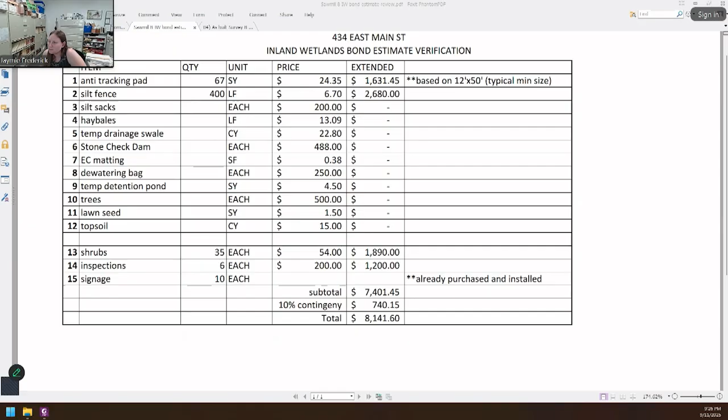So essentially, I'm recommending the release of $4,797.60 for the erosion controls, conservation signs, and related 10% contingency, and retaining the $3,344 for planting and monitoring until the monitoring requirements have been satisfied. So you had mentioned, this is Commissioner Bassermann, you mentioned three. There's erosion controls, signage, and the other one, oh, the monitoring. Yeah, okay.

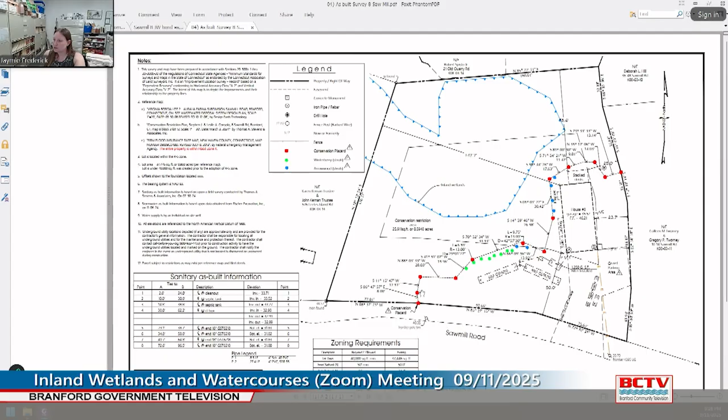And I'll just quickly show you the as-built survey with the conservation placards denoted. Mm-hmm. And then the green dots are the plantings. Oops.

We need a motion on 8 Sawmill Road. This is Commissioner Mirsky. I can attempt to make a motion. As to petition 20-1-12-01, a request for release of bond at 8 Sawmill Road. The commission requests that a partial bond be released as follows. The release of $4,797.60 of the bond on record based on permit compliance to date, which includes erosion controls, conservation signs, and related

10% contingency. The remaining bond of $3,344 shall remain in place until monitoring of plantings has been completed and submitted for a period of 5 years with successful and satisfactory documentation within the terms of the permit. Commissioner Papantonis, second. Further discussion? Any friendly amendments?